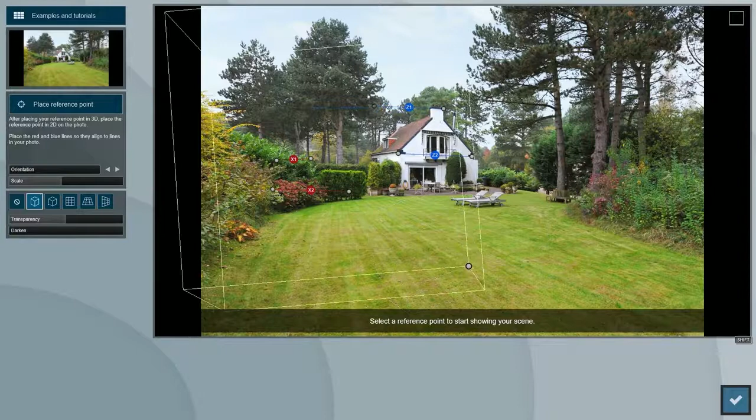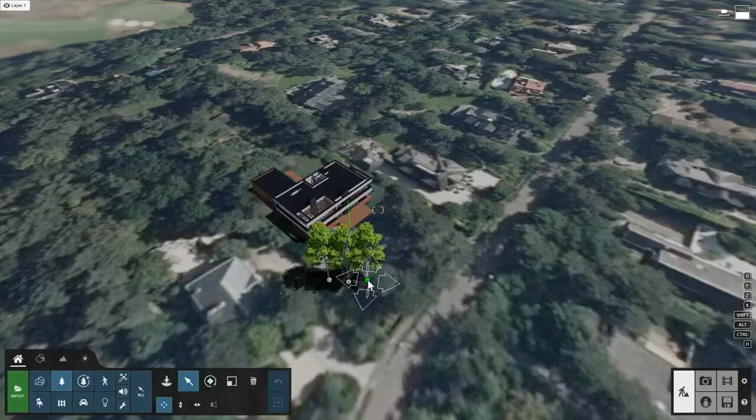In the first tutorial, we saw how you can create a photo match inside of Lumion without needing to edit the final render with other programs such as Photoshop. In this tutorial, we'll use a slightly more complex photo for our photo match. It has some objects in the foreground and background of where we will be placing our house. To keep these additional elements of our photo in the final render, we'll be using Lumion's 3D models and Photoshop. If you don't have Photoshop, any other image editor with similar functionality will do.

Let's start with the basic photo match. We'll start with a new project on the empty green field. Now, let's add the Van Manen Villa model, which we used in our first tutorial.

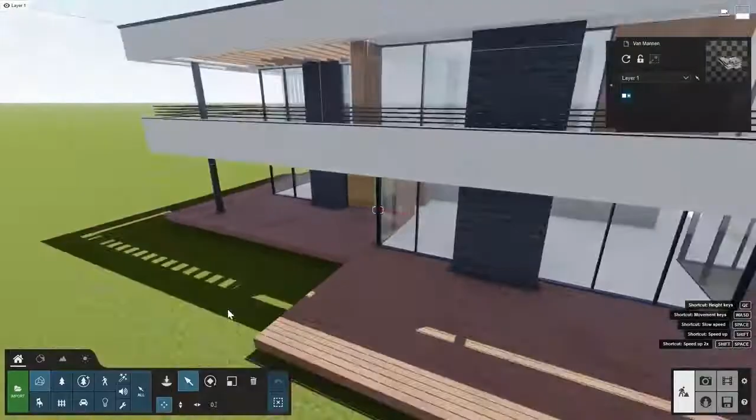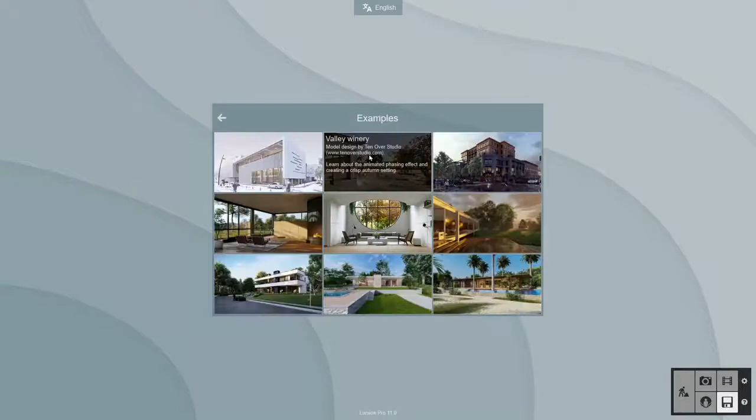Remember, if you don't see the villa in the Import Models menu, you will need to load the Van Manen example scene once so that the villa itself can be made available to use from the import model list in any new Lumion project, such as our empty green field.

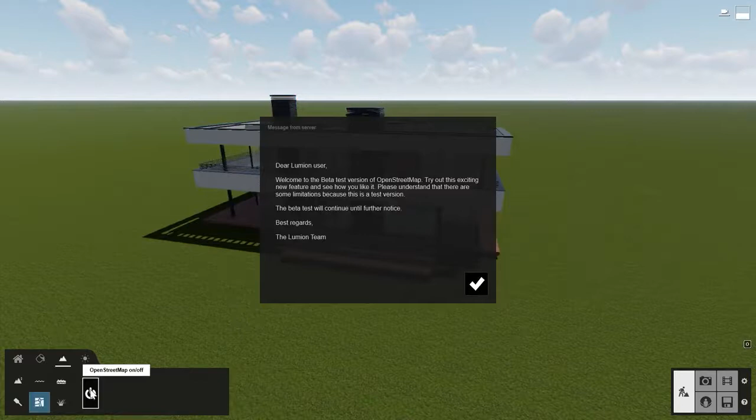To get some context, let's place the villa at its target location using OpenStreetMap, as the OSM objects can help us get the scaling right. We'll use a location in the Netherlands. You can find the full address in the video description to copy and paste into Lumion.

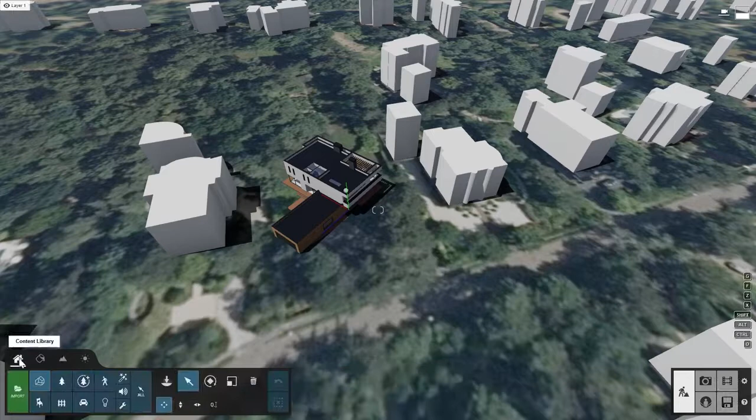Let's hide the object that we see at this location, since it will be replaced with our villa. Let's position and rotate the villa to place it just right. Now that that's done, let's go to photo mode and take a snapshot.

Let's then add the photo matching effect to our effects list. The first default example is an aerial photo, which is similar to our own photo, so we can keep it as is. Now, let's load the photo we'll be using.

If you'd like to follow along with the same photo I'm using, please download it from the link in the video description. Place the red and blue axis lines as we learned in our first tutorial.

Luckily, the house in this photo is close to a rectangular shape, so we can use its walls and edges to get the perspective right. Remember, you can use the cube and grid to help guide your axis lines.

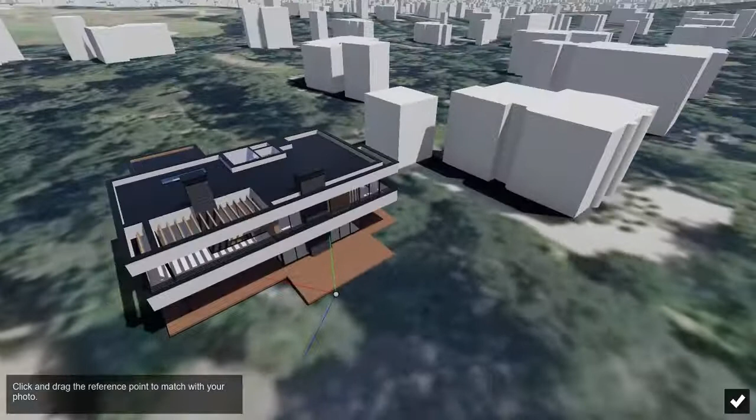Let's place the cube's anchor point on this corner of the house in the photo, which will indicate where our model will be loaded. Clicking on Place Reference Point will take us back to our Lumion model and OSM map, where we will place the reference point in the same corner of the villa. After confirming, the model will be loaded on the photo.

Rotate and scale the model until it matches the photo. As you can see, you can use the OSM objects as references to get the scale right.

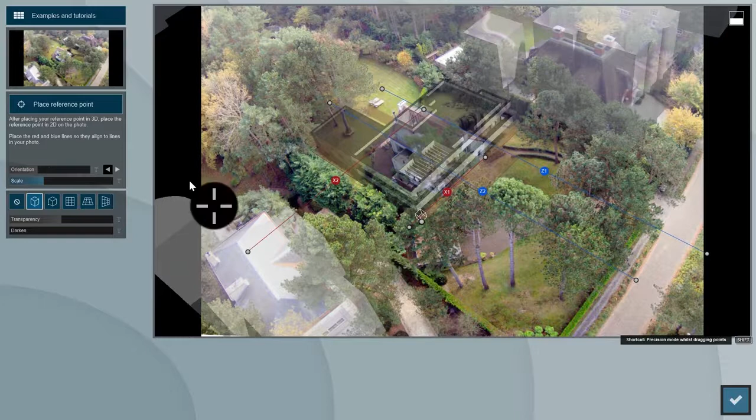Use the base of these objects for reference, as their height data is not set correctly in OpenStreetMap. Press the Shift key while adjusting the scaling slider for more precise control.

Now that it looks decent, we can go back into our editor mode and hide the OSM objects so that they don't show up in the photo matching.

Don't worry that our house is bigger than the one originally in the photo. We'll go over tips on how to fix areas where our model is on top of the bushes and trees of the photo.

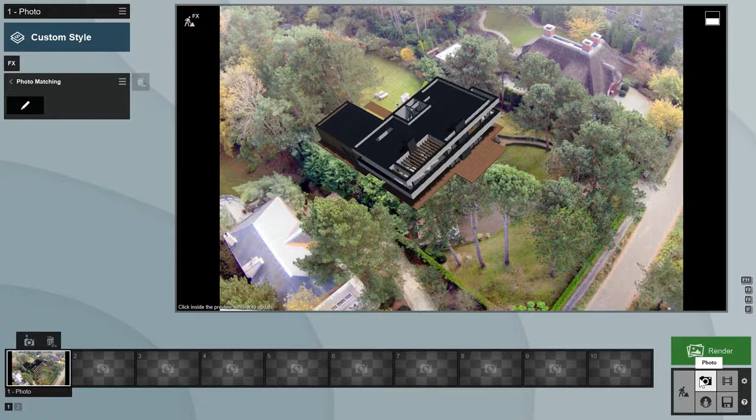Now it's time to edit the lighting effects that are used on our 3D model to get it to blend in better with the photo. It looks like the photo was taken on an overcast day. Let's load the overcast style.

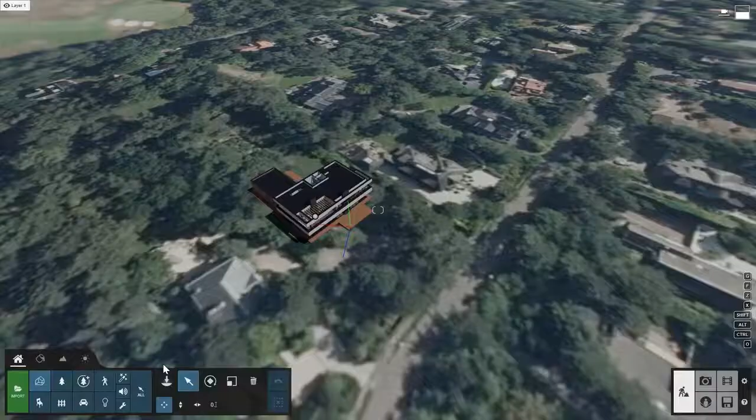There are some trees at the front and side of our villa which are being obstructed, when they should actually be in front of the villa from this perspective. To fix this, we'll place similar trees and bushes from the Lumion library at the same positions.

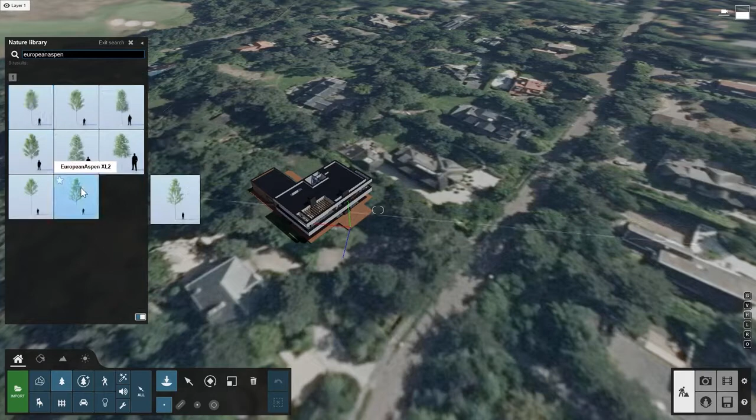Select a tree which looks like the trees in the photo that are in front of the house. For example, European Aspen XL2. Let's place one and then return to photo mode to see how it looks. The tree is too small and needs to be repositioned.

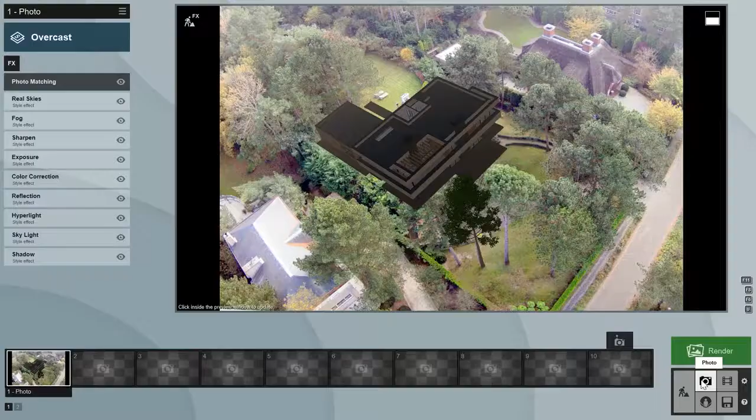With a bit of trial and error, you can get it at the right spot. With Shift-Alt, make 2 copies of the tree, then turn and scale each so they're slightly different for a more natural feel. Do the same for the bushes at the side of the house. Since they're positioned on a straight line, you can use Lumion's Mass Placement tool.

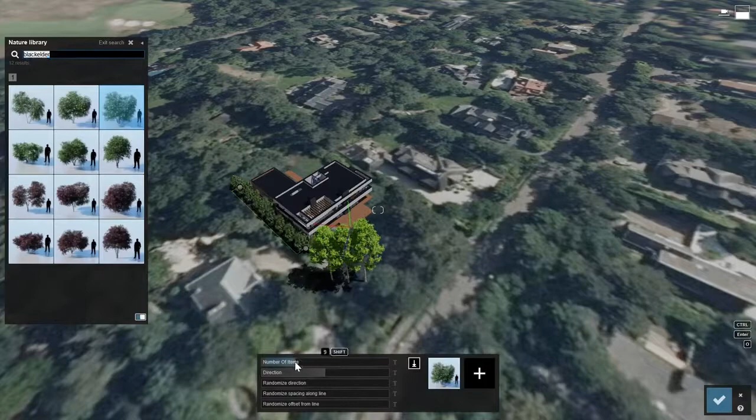Looking at the render preview, I think we're off to a good start. But now let's do more to make the model blend better with the photo. We can see the color of the original photo looks a bit bluish. Also, there's a small part of the roof on the old house that's still visible.

Later, in Photoshop, we'll address all of this. Before that, let's tweak and add some more Lumion effects to make the image and model blend together better. The new villa looks a bit too sharp compared to other elements in the photo.

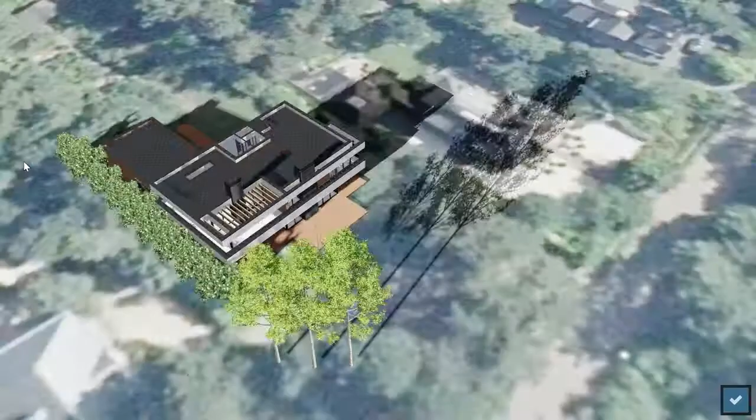Let's make it slightly less sharp with the depth of field effect by setting the focus distance different from the real distance. For example, we can set it at half the real distance, which you can measure using the autofocus option, and then play with the amount slider to get a similar level of blurriness as the photo.

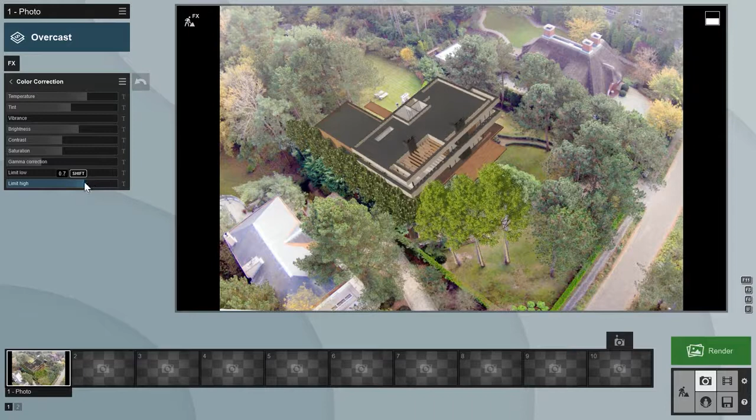The villa also looks a bit too dark compared to the photo. Let's add an overcast real sky. Later, we'll apply some tweaks to our color correction effect to bring the light closer to the photo. To make the villa lighter, let's set the limit high slider slightly lower than the max - 0.7 should do it. Let's render the image and see what we get.

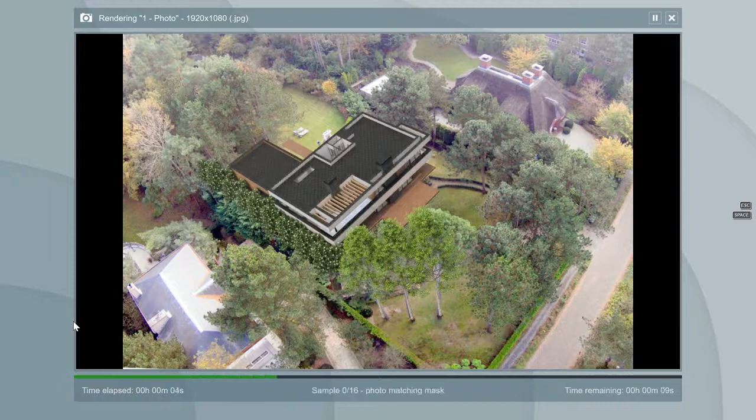Lumion renders not only the photo match, but also a photo mask and the scene without the photo. We won't be using these extra outputs in this tutorial, but we will use them in the next one.

Now let's head over to Photoshop or any similar image editor to make the corrections we spotted earlier. We'll need to edit the original photo and re-import it into the photo matching effect when we're done. Unlock its layer, click on Adjustments, then Brightness Contrast, and increase the contrast a bit.

Click on Hue Saturation. Select the blues from the drop-down box and set the saturation a bit lower. Do the same for the magentas, and then for the master. Click on Curves and adjust the curve like this.

Now we can take out the visible roof of our original photo using the Clone Stamp tool in Photoshop. Select the original photo layer and activate the Clone Stamp tool. While holding the Alt key down, click in the grass area close to the roof to take a sample. Let go of the Alt key, move the cursor down, and stroke left and right across the roof to turn it into grass. Export the image.

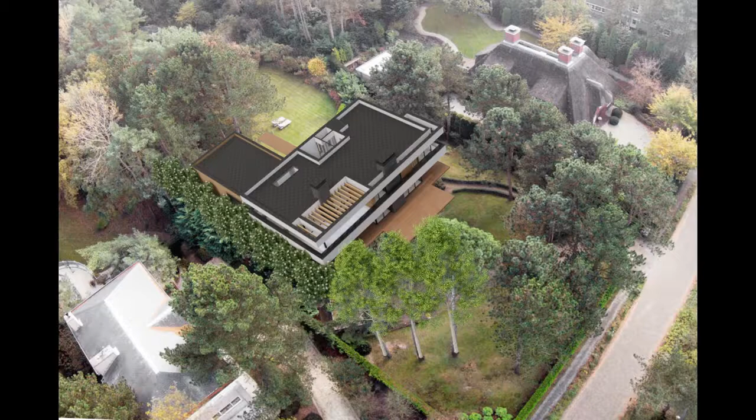Load this new image into the photo matching effect in Lumion. Let's render the photo match again. Looks good - the obvious issues we spotted earlier are now much better.

That wraps up this video. In the next photo matching tutorial, we'll make a slightly more complex image, where we'll learn how to place elements of the original photo in front of the Lumion model. So stick with me, and I'll see you in the next tutorial.